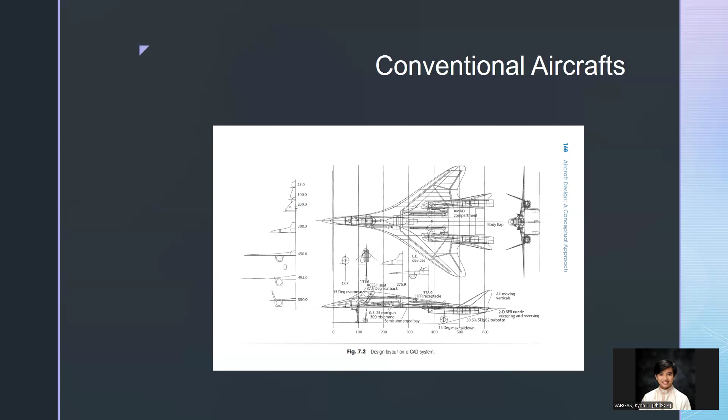As instructed in the syllabus before, you should already know that aircraft design is the collection of all AE subjects—air laws, aircraft systems, aircraft structures, strength of materials, engineering statics and dynamics. These are needed for this.

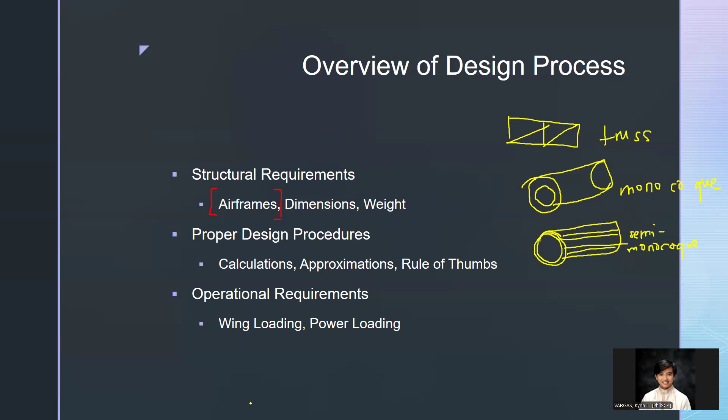Next is dimensions. For structural requirements, why is this important next? Dimensions and weight—these are almost connected. Different aircraft require different manufacturing processes as well as different designs.

So for a large aircraft, let's say the A380, versus a small aircraft, let's say a Cessna, you can't interchange the structural types between them despite one having more pros or cons—let's say the semi-monocoque structure has more advantages—even with materials, you can't just substitute them even if it's supposedly the best.

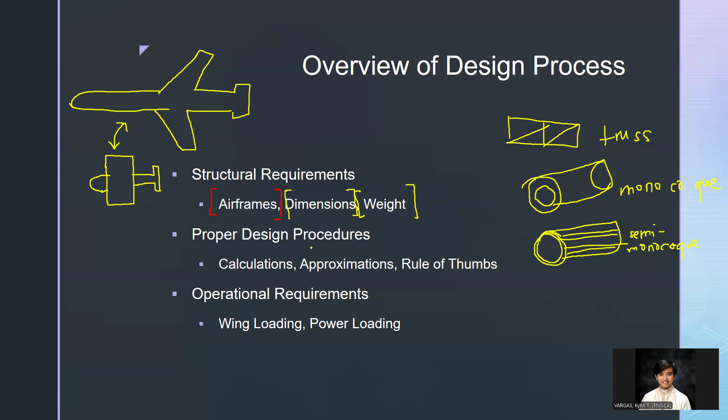Next is proper design procedures. We have three: calculations, approximations, and rules of thumb. For calculations, this is mainly what we'll do, but not the most accurate of all, which involves higher order derivatives and integration.

This also includes matrices seen in simulations. For these calculations, these are the known formulas—you just plug and play, but you need to know the parameters. Next is approximations, also called empirical data. So what is empirical data?

Ito yung mga known data na na-prove, paulit-ulit na lang din ginagamit kaya may pattern na nakuha. Pero kino-compute pa rin siya regardless. May ginagamit lang na values. Ang katulad netong nature ay yung 4.26 or 5.26 dun sa aerodyne nyo for negative g0 over R lambda T. Paulit-ulit na kasi, tas halos same lang yung lumalabas.

So, nagbigay na siya ng known values. And last is yung rule of thumbs, which hindi natin gagawing standardized practice. Ginagamit to madalas sa pag nag-perform na tayo or po-prototype na tayo of UAS. Ano ba yung rule of thumbs? Yun yung parang sinusunod na lang natin, tapos wala naman known data, pero alam natin na gumagana. So baka coincidence lang or baka yun talaga yun na hindi pa lang natin napuprove.

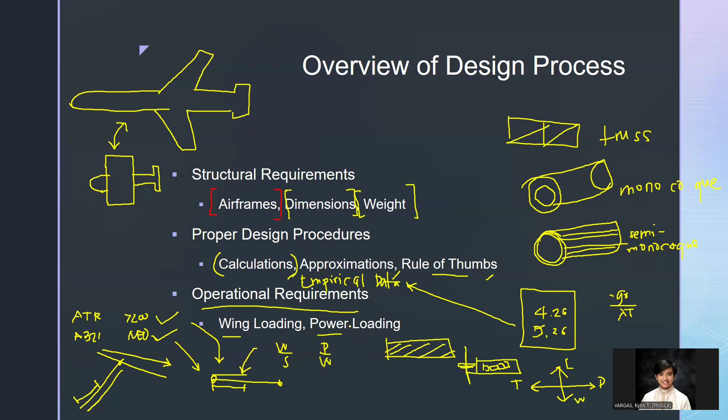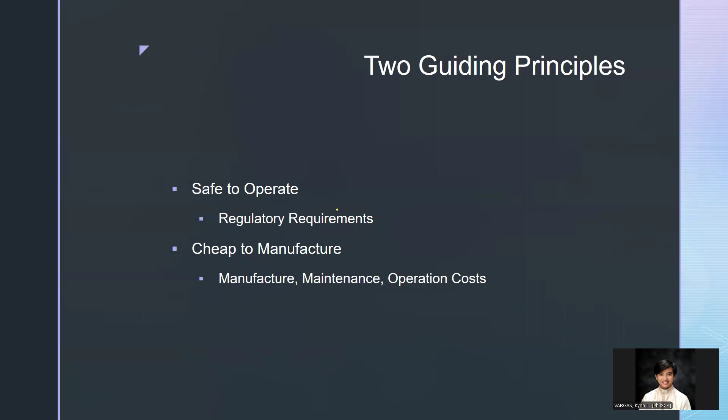So okay na dyan? Dito naman tayo sa two guiding principles which are safe to operate and cheap to manufacture. So ito yung sinusundan natin na ideology when it comes to design. For your safe operation, meron tayong mga regulatory requirements, usually ito yung FAR chapters. Baka nakalimutan na, so meron tayong chapter 21, 23, 25, 27, 29, 31, 33, lagyan natin, skip na, 34, 35, 36. Pakitandaan na ulit to ha. Ito ay aircraft parts and specifications, small AC, large AC, small rotorcraft, large rotorcraft, propeller, engine, noise, tapos pollutants.

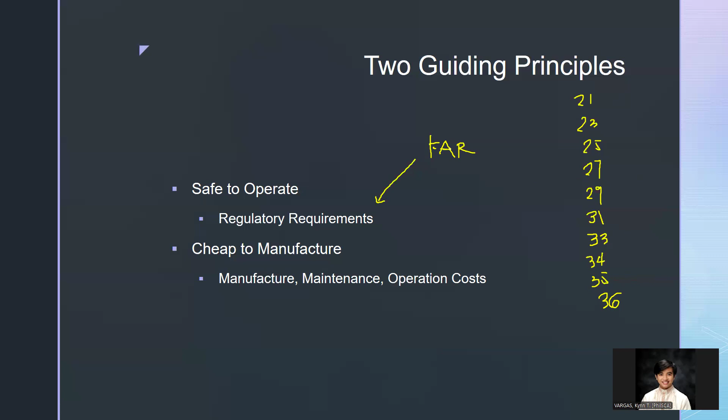So medyo unsure dito sa part na to pero marirevisit naman to. Meron naman tayong books, basahin nyo na ulit kasi nga kailangan ito yung mga items na dapat expected, alam nyo na. So madali naman mag-recap.

So next naman ay cheap to manufacture, maintain, and operate. So dapat pag magde-design is ganun. For this instance, hindi muna tayo mapupunta dito kasi nasa preliminary stage pa lang naman tayo. Pero for the sake of discussion, bakit kailangan cheap to manufacture? Siyempre, para mura yung parts for availability. Bakit kailangan madali ma-maintain? Manpower, like, may cost yan and it's not only monetary but time as well as operational cost. So hindi ka magde-design ng palugi.

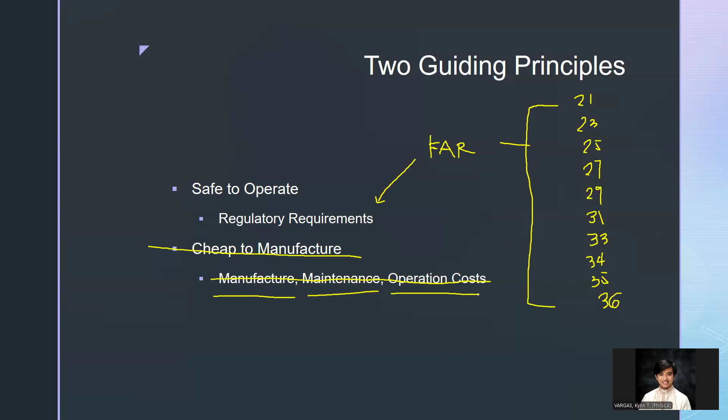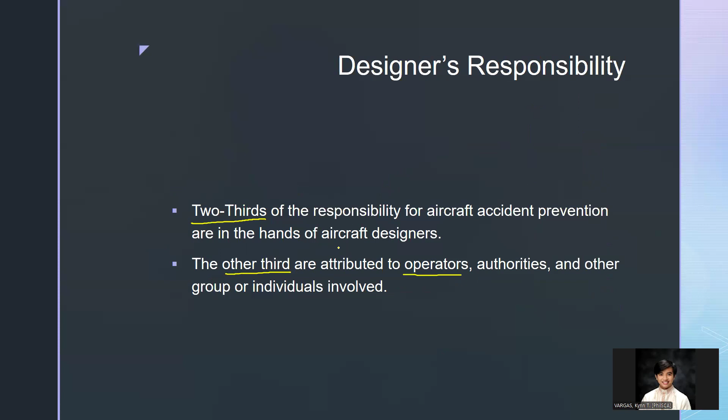So nakukuha yon, proceed tayo sa kasunod, which is the designer's responsibility. Two-thirds of the responsibility for aircraft accident prevention are in the hands of aircraft designers. Yung other third, doon na siya sa mga operators. So ano yung example nito? Ito, if na-encounter nyo to sa APMPC nyo, or aircraft production planning and control. So yung MCAS or the Maneuvering Characteristics Augmentation System is a reminder that poor design will lead to fatal consequences.

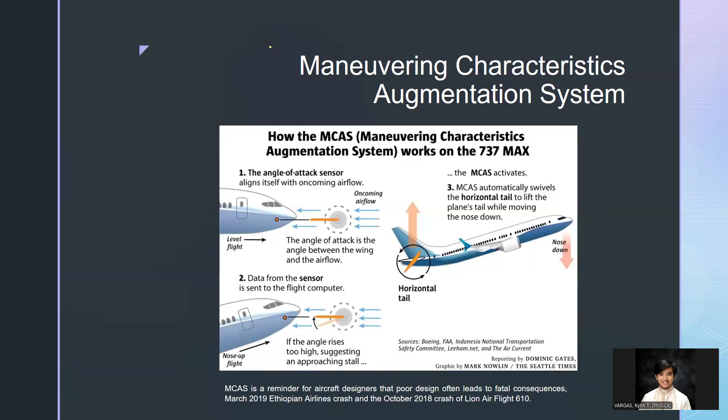So alam niyo naman na siguro kung ano nangyari dito. May automatic sensor kasi na sa isa lang nakalagay, walang redundancy, naging faulty. Then hindi alam ni pilot na may ganun palang system. And ayun, it causes the aircraft to pitch nose up, which is unstable. So pitch up, nose down, bigla magdo-nose down siya. Tapos ayun, nagiging phugoid na siya or nagkakaroon ng oscillations until na hindi na makontrol. So more on that, less on that, more on this.

Dito na tayo sa procedures in design. So for this instance, for prelim, dito muna tayo sa selecting type of airplane.

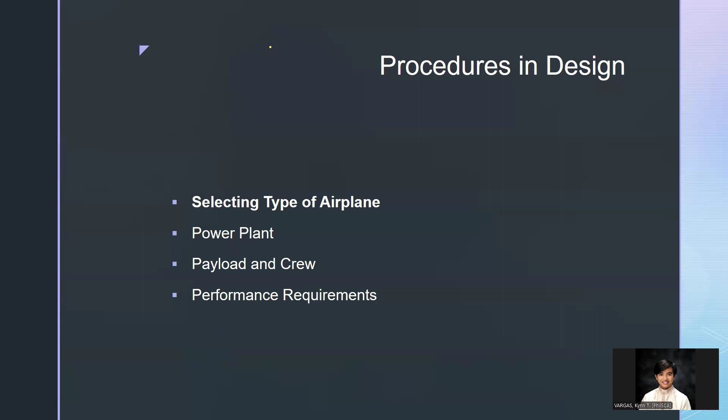So, choosing an airplane: monoplane and biplane. Configurations based on the number of wings attached to the aircraft. Let's start with the biplane.

Theoretically, as you increase wing area, you get an increase in lift. Lift is equal to 1/2 rho V squared S CL. That's correct, right? So let's use the proportionality constant. Let's remove this. What we need is lift and surface area.

When you cancel units, instead of an equal sign, we write the proportionality sign. They correspond directly, meaning this is direct proportionality. So as surface area increases, lift also increases, which is true for a biplane since it literally has two wings. So the lift is stronger, higher.

Let's go back to the proportionality constant so we can use it later. Let's write it again - this time using velocity and CL. We cancel everything except velocity and CL, leaving velocity squared CL. Transferring, we get 1 over CL is proportional to V squared. So this one is indirect proportionality.

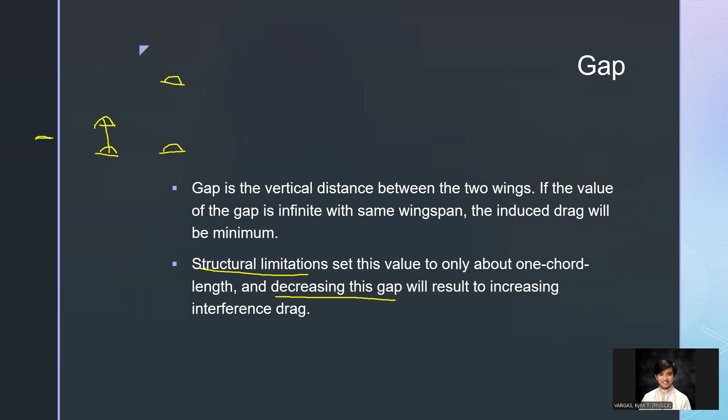Pag dinecrease mo naman yung gap, yung interference, so CDX, kasi i-designate natin as X, tumataas yung interference. So, ayan, ang daming types of drag, baka magkalituhan.

So discuss natin muna yung different types of drag. Wag mo na tong wave drag, this is for Aerodie 3. Doon tayo sa Aerodie 1, which is parasitic, and Aerodie 2, which is induced. Yun yung common na na-discuss. For parasitic, ano yung mga meron dito?

First is yung profile drag, and next ay yung interference drag. Under profile drag, meron pa rin naman dito which is yung form and skin friction. Actually, marami pa to, pero ito yung mga common na ginagamit.

Dito tayo sa CDO. Sa CDI na tayo pala, sa induced. So ito, ang sabi, kapag pataas daw yung value, lumiliit daw yung induced drag. So bakit kaya lumiliit yung induced drag? As you infinitely increase in...

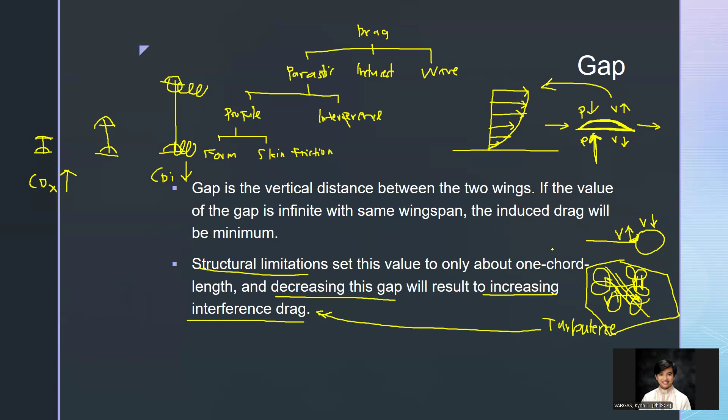Moving forward, dito naman tayo sa span ratio. Pwede nyo itong i-pause dahil recorded session naman to. For span ratio, it is the ratio naman between the shorter wing and the longer wing. The usual biplane configuration is ganito, pantay lang. So ito, ang span ratio nito is 1.

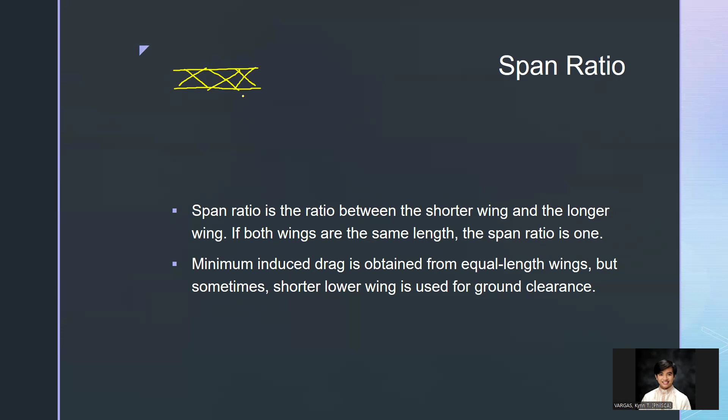Ngayon, bakit may mga times na ganito yung biplane? May mas maikli. So kailan lang to nangyayari? Ginagamit siya minsan for ground clearance. So let's say may mga bush dito, may mga bato. Yun yung purpose nun, kasi hindi naman tatamaan tong mas mataas na hangin.

So ito halos kasi laki lang nung fuselage, which hindi natin problemahin dito. Bakit may mga bato sa may mga bush dun sa runway nito? Tandaan natin, yung biplane kasi usually ginamit siya noong war times o nung earlier development pa ng aviation. So wala pa tayong masyadong magandang runway nun. So yung minimum induced drag is obtained if equal length.

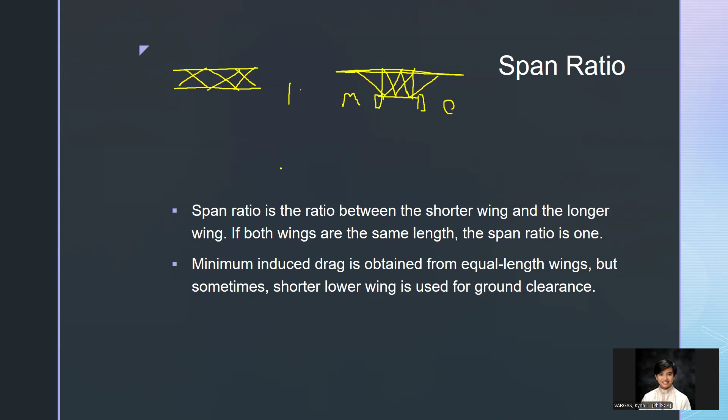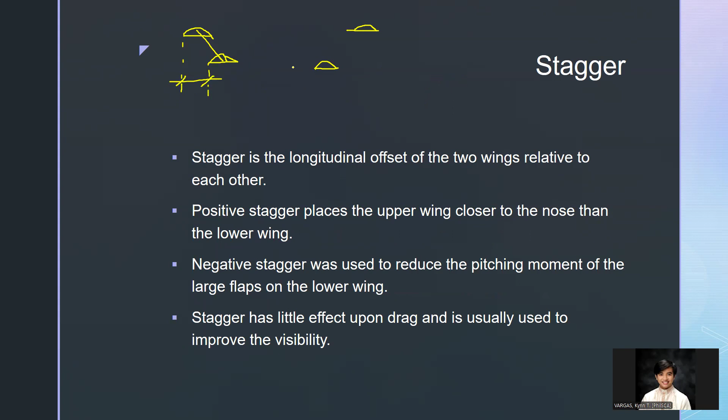So other than that, ito lang naman yung pinagagamitan ng span ratio. Next ay stagger. So napansin kanina, ito, hindi siya pantay, di ba? So dito natin balikan, so stagger tayo. We have positive stagger is if upper wing is close to the nose, and negative stagger is the opposite. Ito yung stagger pala, ayan, yung distance naman na to between the, ano to, the leading edge.

Positive and negative stagger, lagyan natin ng plus sign, lagyan natin ng negative sign.

So ano naman yung introduction, ano yung effect nito? Meron siyang little effect sa drag. Tapos, meron din naman siyang additional pitching moment which is a design topic pa. Pero, ang main talagang purpose niya is for visibility as discussed here.

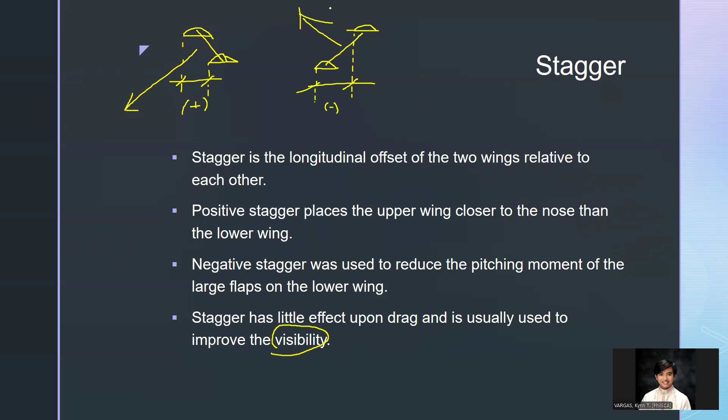Instead of papantayin, why not gawan natin ng view which is for downwards view kung nasa taas ka tas gusto mong atakihin yung nasa baba. And ito naman yung mga low altitude which ang gusto nila is makita yung nasa taas. Yun lang kasimple. Next, decalage.

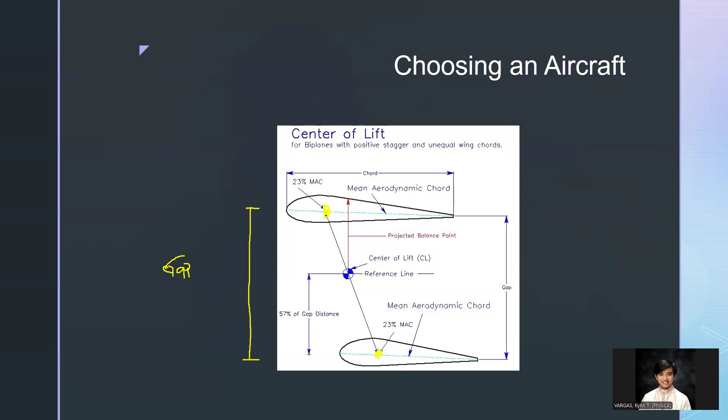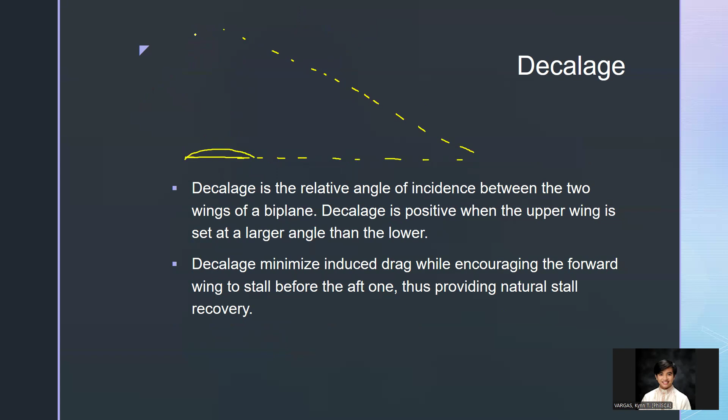Decalage is the relative angle of incidence. So kung papansinin kanina, hindi yan pantay. Naka-angle yan. So ito, ito yung isang wing, airfoil. In-exaggerate ko na lang yung angle.

Tapos let's say, positive stagger. So ano yung purpose nito? I-introduce ko na lang din. This is another aircraft design 2 topic or idea. Pero pag dito tayo sa isa, sa taas, balik tayo sa Aerodynamics 2.

This is the CL versus angle of attack graph. As you increase in angle of attack, ano nangyayari? Nagkakaroon tayo ng increase in coefficient of lift. Pero, further increasing will cause it to stall. So, dahil mas mataas yung angle of attack nitong isa, mas mauuna tong mag-stall compared dito.

Depende kung saan siya nakalagay, it will provide a natural stall recovery. So dito, decalage minimizes induced drag while encouraging the forward wing to stall before the other. Ito yung ginagamit for positive stagger. Kaya nga usually positive stagger yung meron.

So dito, nagkakaroon siya ng mag-stall, maka-cancel, malilipat yung CG. Tapos, ang gagawin niya, magkakaroon siya ng initial response to go back to the equilibrium state. Tapos, ayun, since andito tong lift nito, dito siya iikot. So, imbis na umaangat siya dito, ibabalik niya into the original state.

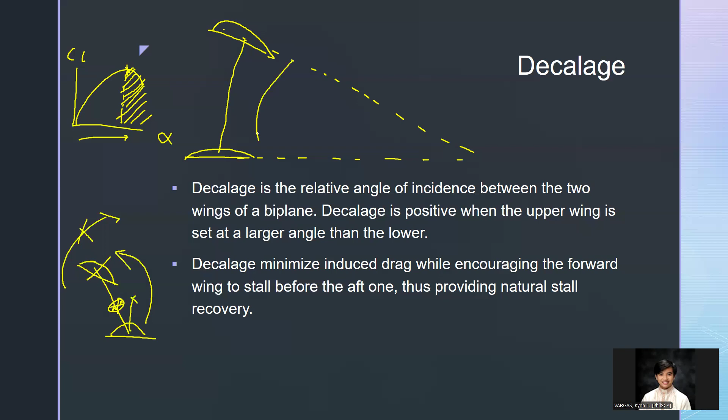Which, medyo magulo pa siya para sa inyo. Mahirap pa siya intindihan kasi it's for a design topic pa. So, before tayo lumayo, intindihin lang natin for now na ang decalage is the opening of the angle of incidence between the two wings. So, nakukuha yan? Proceed na tayo doon sa kasunod.

Ngayon, medyo madami. Tapos, ang ending lang pala, sa biplane kasi, nakita nyo naman na kanina sa introduction, mas lumalaki kasi yung induced drag. Ngayon, induced drag lang ba? Hindi. Meron pa kasi siyang parasitic drag dahil dito sa mga, ayan, meron pa tayong mga struts. So, nagdadagdag pa yan ng parasitic drag.

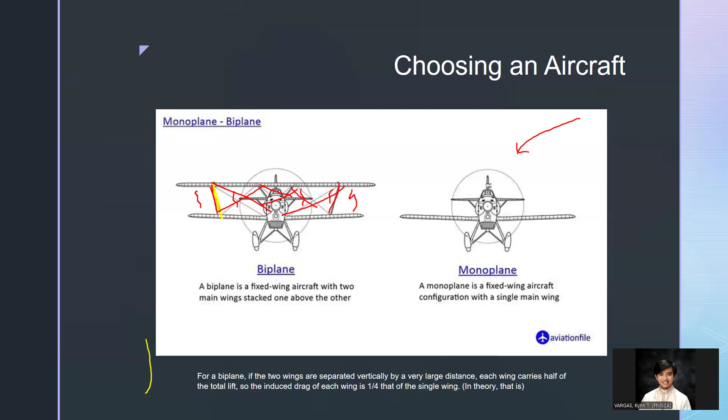And another is interference drag. So, napakarami dyan, no? Madami dyan pwede mag-interaction. So, kung nakukuha yun, intindihin natin na ang kailangan natin ay monoplane configuration. And dito na din yung papagamit ko sa inyo, isasuggest ko sa inyo when it comes to aircraft design.

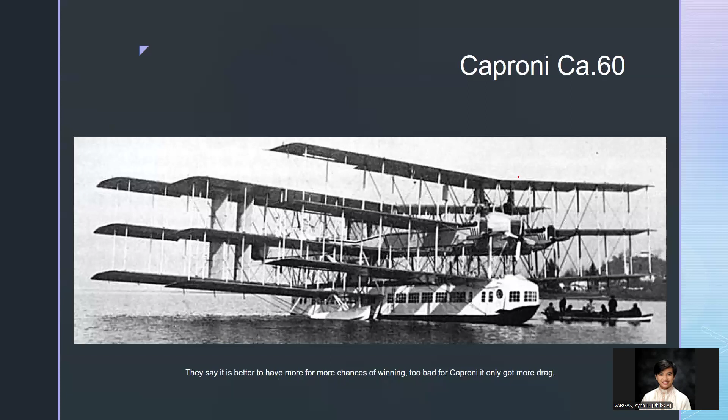Bakit? Ito kasi is another example, Caproni Ca.60. Sabi nila, di ba, mas mataas yung lift, mas maganda, which is not true. As debunked na from previous examples, na-feature pa to sa The Wind Rises. Itong seaplane na to, hindi to lumipad. So, masyado siya maraming induced drag and interference drag for it to generate enough lift.

Let's say, ito yun, gawa tayo ng graph. Let's say, pag mas marami di ba ng wings, mas maraming lift. Totoo naman, ito yung lift. Sa itong kulay pula, gawin nating drag. Ngayon, ito naman yung, let's say, monoplane lang. Ito yung lift, tapos ito yung drag. So, kung titingnan mo, mas maraming lift yung 9 wings compared dun sa 1 wing.

But the problem is, napakaraming sayang dun sa 9 wing. So, nagge-generate ka ng energy for what? Para nasasayang lang. So, hindi siya efficient. Bigger is not always better when it comes to this type of designs.

So, ang kailangan natin is optimal. Hindi natin kailangan na masyado maraming pakpak, maraming masyadong engine, the best of this, the best of that. Ang kailangan natin is kung ano yung hinihingi sa requirements. If nakukuha yon, proceed tayo sa kasunod.

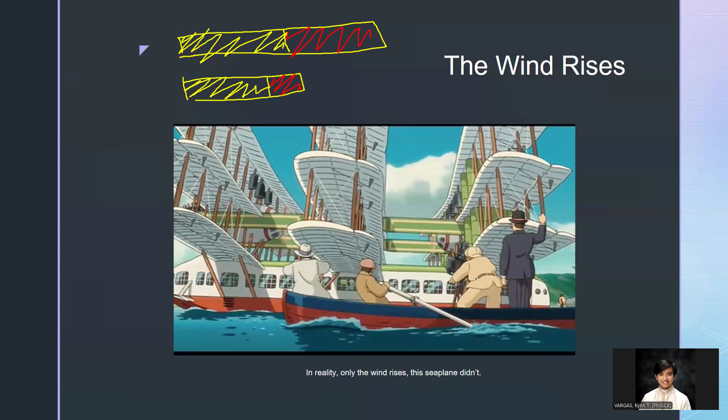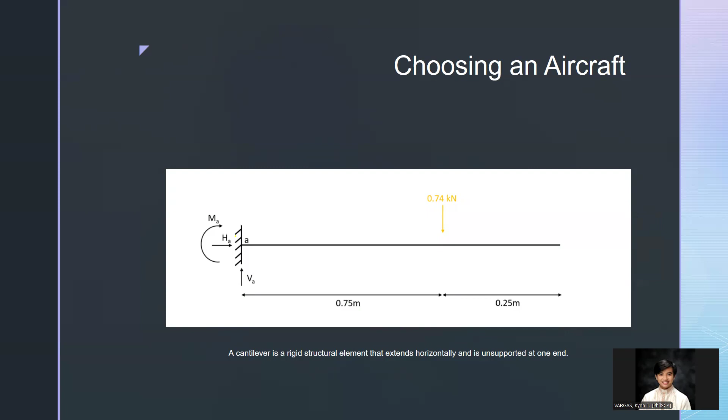Kung sa tingin nyo, meron tayong moment. Ito yung full cantilever. So, ito, mapapalabas na kung saan dito yung calculations. Bakit kailangan yung full cantilever for aircraft design? Full cantilever is, wala tong mga additional support sa labas. So, less drag to. Medyo mabigat lang siya, pero structurally just.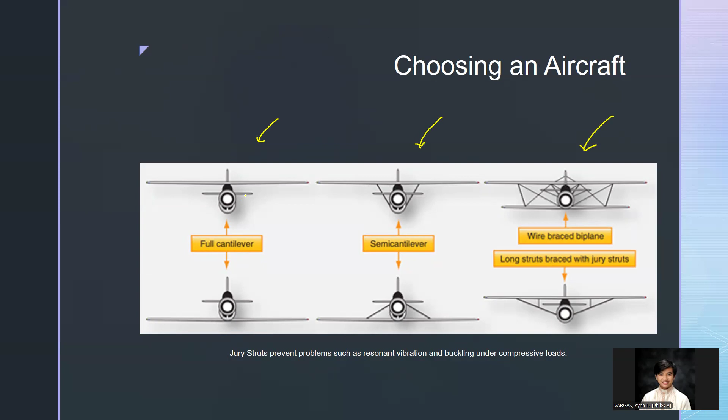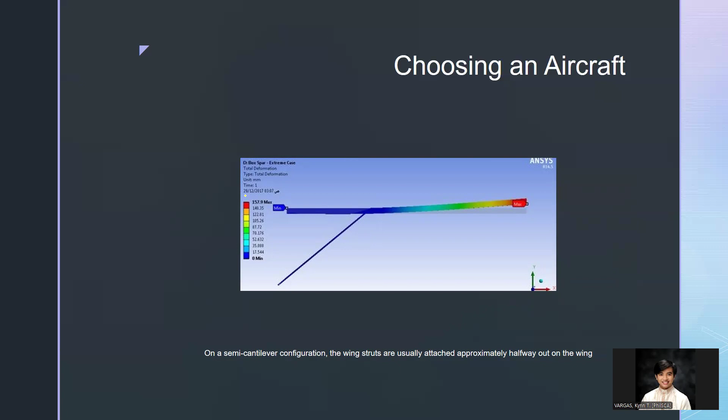Matibay to. So, next naman is semi-cantilever. Meron siyang structural support sa loob, pero meron din siya sa labas. If sobra siya sa, let's say, for stability na lang siya, magiging indeterminate na, okay lang din naman, wala namang problema doon.

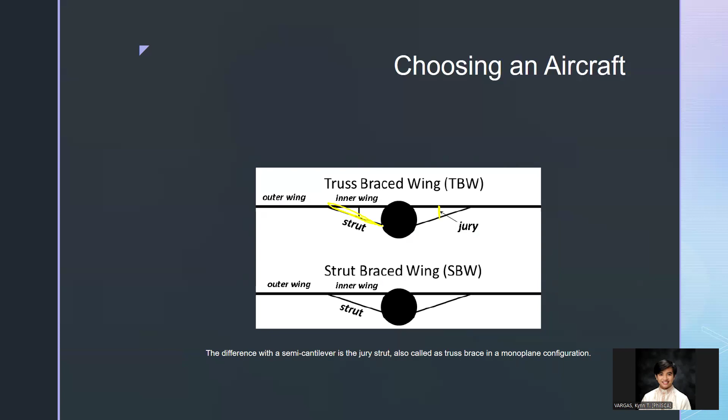Next naman is for, ito yung jury struts na. So, ito yung jury, kasi ito yung struts. So, ano yung purpose din? Yung kinaibahan niya sa strut-braced wing is, ito yung kanina, sinasalo lang diretso yung member. But for jury strut, mainly wala siyang structural support sa loob. At hindi naman sa wala, may lighter, on the lighter end lang. At yung jury strut yung naghahawak dyan sa kanila. So if tinanggal mo yan, baka magkabaklas-baklas yan. So yun lang.

Next is the wing position. For wing position, we have based on position and structure. First, there are three: mid-wing, low wing, and high wing. This is just their position based on the fuselage.

Next, we have dihedral and anhedral wing, which is an angle. For section 2 that we'll watch, yes, it's true as I said before that it depends on configuration.

The usual is for high wing, anhedral is applied, and for low wing, dihedral is applied. For obvious reasons, dihedral adds stability. And for anhedral, it adds controllability. Let's not consider the other configurations for now.

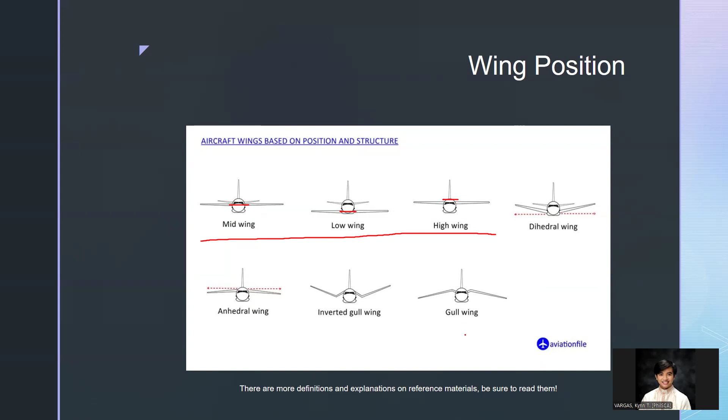Let's focus on the anhedral of the high wing and dihedral of the low wing. Next is the inverted gull and gull wing, which is just a combination of the two, anhedral and dihedral. There are more details here, be sure to read them. There's reference material I gave for your assignment, read it.

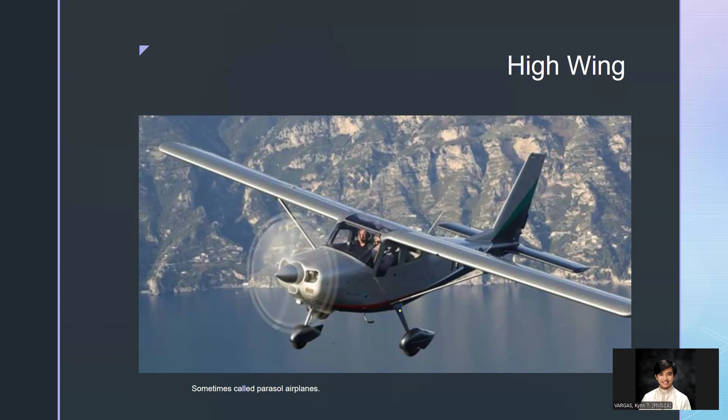More ground visibility too. That's why it's usually used for recreational flying. It's almost an unobstructed view. Same with student pilots. Next is stable or easy to fly.

Stable in low speed. Talking about stability, for high wing, it's easier, it's more stable. And for low wing, it's more controllable.

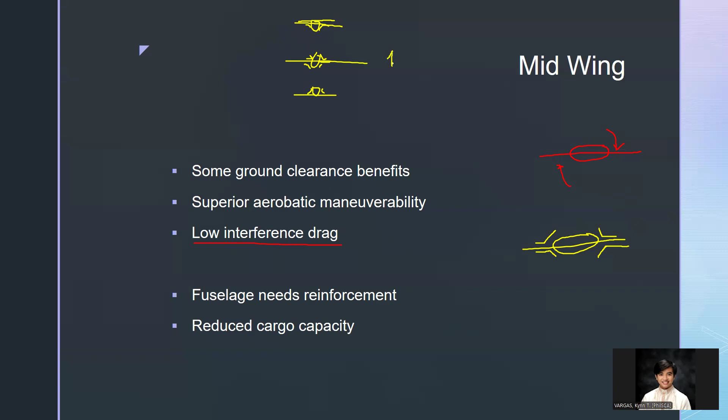If you consider what was said earlier, for low wing and for the Aerodynamics 1 concept, let's say this is the airfoil, the velocity of the body or fuselage is low. Now, on the upper surface, the velocity is high. For the lower surface, the velocity is low. So now with that idea, when you look at it, this is similarly low compared to the high wing.

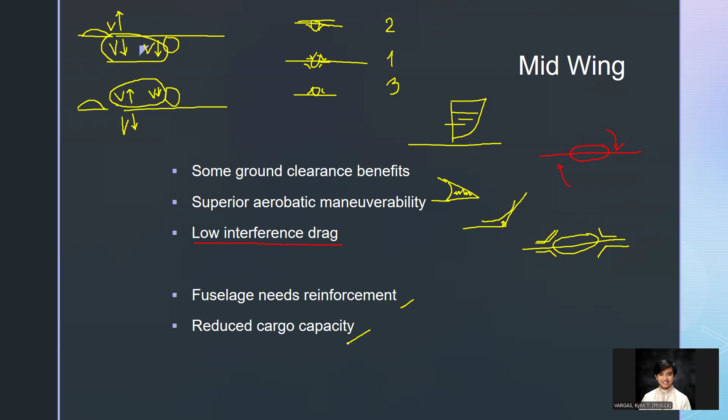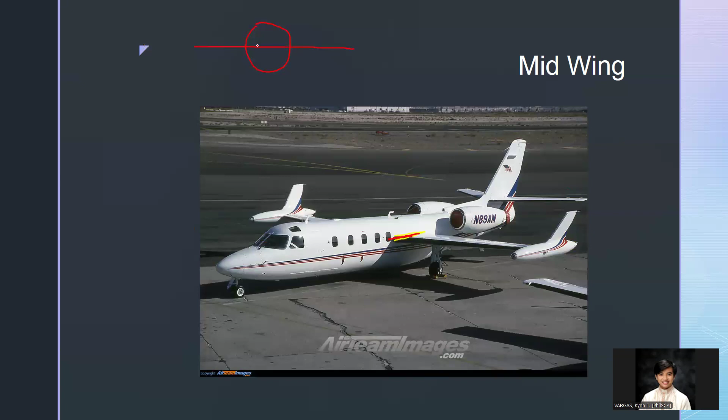Fuselage need reinforcement and reduce cargo capacity. Ano yung kailangan nating intindihin? Fuselage needs reinforcement. Tingnan natin dito. Nag-cut through kasi sa gitna yung structure. So, it's either one, literal na pumasok siya dito, or two, puputulin yan.

Dito muna tayo. Pag dumire-diretso yan, wala nang space dito, so it's mainly for structure lang. Pero kung puputulin naman natin siya, need natin ng structural reinforcement. Let's say ganyan, while yes, accessible pa din, mas mabigat naman to. So, either of the two, lagi siyang merong reduced cargo capacity and meron siyang additional reinforcement. Hindi na nagiging usable space.

For fighter jets, hindi siya iniinda kasi lalagyan lang yan ng fuel. Pero dito sa transport, kung mapapansin nyo, walang bintana dyan hanggang dulo. Hindi na siya magagamit. Hanggang dito na lang yung usable for cargo, for people. Kung ano man yung itatransport nito.

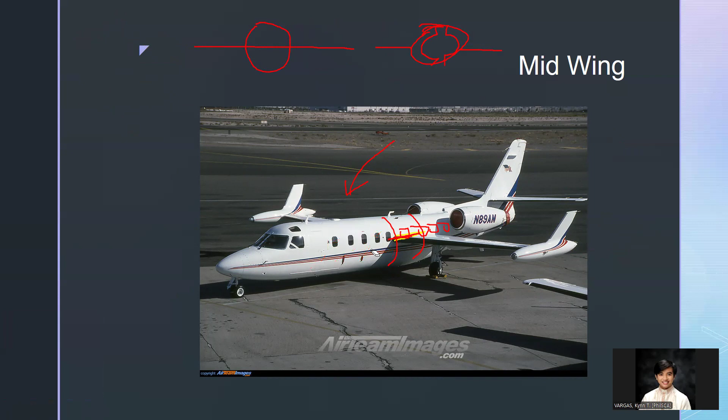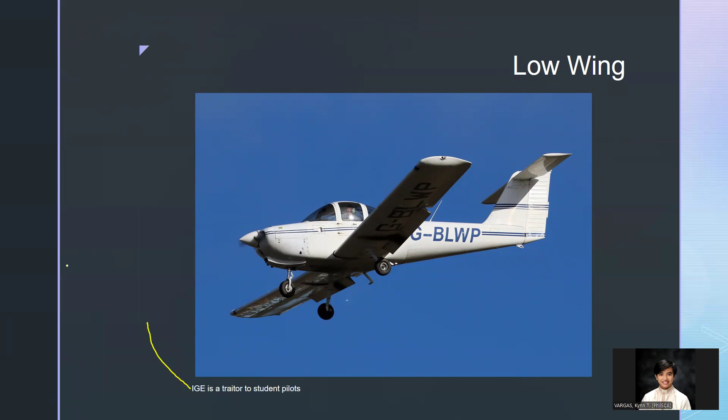Kung nakukuha yun, doon tayo sa low wing, which is opposite naman. Pero meron ditong topic na kasulat - IGE. Kung hindi pa familiar kung ano ang IGE, it's in-ground effect. So, IGE is a traitor to student pilots. Bakit kaya? Bakit madalas high wing yung ginagamit?

May mga advantages pa din naman to. Landing gear is integrated in the wing box. Kung napapansin, hindi naman napakaliit, maigsi yung landing gear. Pwede kasi siyang ipasok dito, magiging flush siya. Unlike dito na hindi mo mapapasok yan. For low wing, kayang-kaya mo ipasok sa loob without sacrificing in structures.

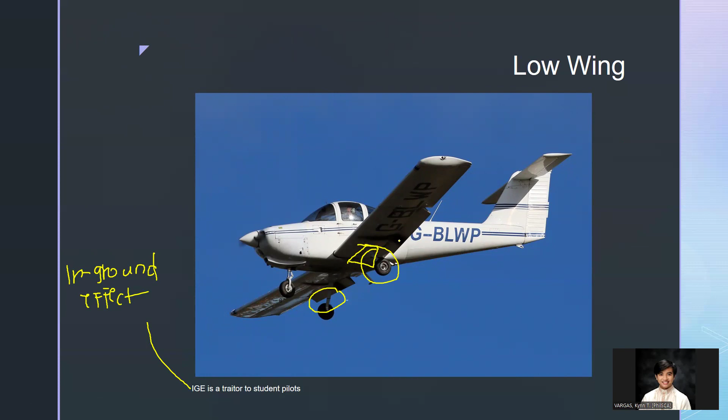Kasi makunat na yung wing box, dikit-dikit yung frames at ribs niyan eh, saka yung mga stringers niyan, may I-beam pa yan. So, landing gear is integrated in the wing box. Less drag din yan, kasi may flush mo to, matatago mo to eh.

So next ay good climb visibility. Poor ground visibility, the opposite lang naman. Low ground clearance, controllable, another opposite lang din nitong isa. Dito tayo mag-focus sa faster maximum speed with less drag.

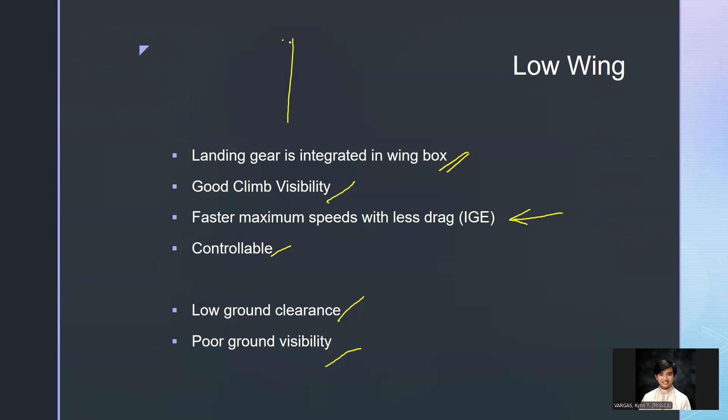Bakit less drag? For IGE kasi, nag-occur siya one wingspan. Let's say ito yung aircraft. So, one wingspan sa ground, nag-occur yung IGE. Anong meron sa IGE? Yung induced drag kasi is ganito, nagta-travel siya here, ito yung arrow, tapos iikot siya papunta dito.

Bakit siya umiikot? Ang gusto kasi nito is higher pressure region will go to low pressure region. Pagdating dito, mas mabilis to compared dito. Bakit? Boundary layer, tulad nung kanina, mabagal dito, dito mas mabilis. Ngayon, ang nangyayari, may direction dito, umiikot. Ito yung in-ground effect.

Tingnan natin dito. For out-of-ground effect, iikot lang kasing ganito yan yung hangin, yung induced drag. Pero, for in-ground effect, nababasag kasi siya. So, ang nangyayari is ganito na lang, nagiging patulak siya imbis na paikot lang. Ngayon dahil patulak siya, tumutulak yung low wing natin na aircraft.

Nagkakaroon tayo ng floating tendency, which is more evident sa low wing, kasi siya yung mas malapit sa ground eh. So compare mo yan sa low wing saka sa mid wing, high wing. Low wing yung may pinakamalakas na IGE. Engineer, lumulutang pala, may dagdag lift.

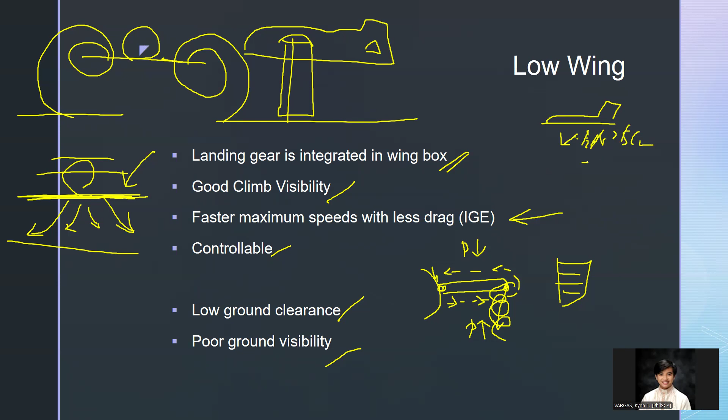I-compare natin si v squared and cl. So, meron tayong equals v squared cl. Cl is proportional to 1 over v squared. Pwede din baliktad, v squared is inverse to CL. Ngayon, during landing, mabagal si velocity. Therefore, si CL mataas to compensate sa lift para maging airborne siya.

Ngayon, using the CL-alpha graph, ito ay CL, ito yung angle of attack. Kung nagtaas si CL, mataas din si angle of attack. Na question, kapag nagla-landing tayo, tas dumulutang ka, mag-overshoot ka, di ba? So, ang gustong gawin ni student pilot, ipupull up niya. Ngayon, nag-pull up siya, dahil mataas na yung angle of attack, ang mararamdaman ng aircraft mo, lalong lumalakas tumataas yung angle of attack.

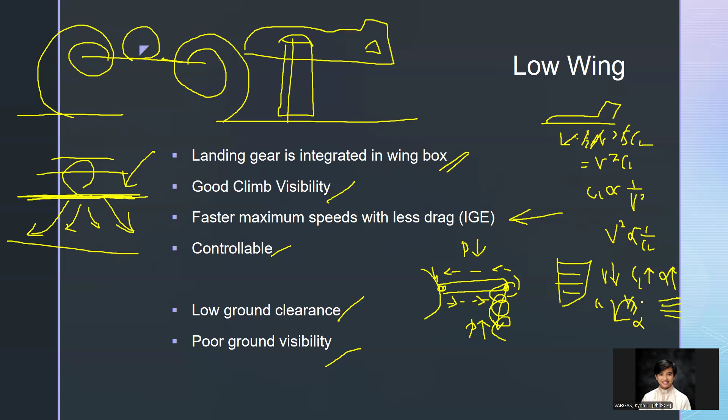So, mag-i-stall ka ngayon. Dahil nag-stall ka, babagsak yung aircraft. This is the reason why maraming mga low-wing na aircraft ay nagkakaroon ng crash pag student pilot yung nag-handle because of the in-ground effect, unfamiliar with the in-ground effect and hindi din alam kung ano yung dapat gawin. Nakuha yun? If yes, proceed tayo dun sa kasunod - Dihedral.

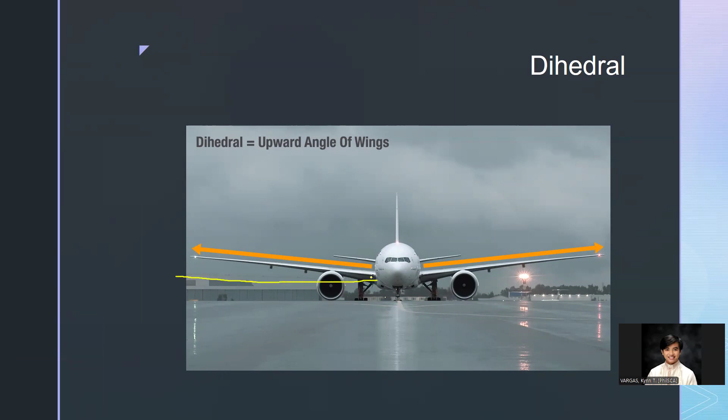If you notice, ito yung plane reference, tas meron tayong angle. Yung main reason kasi dyan, marami. Isa na dun is yung for fuel purging, kasi dito maiipon lahat ng debris. At kapag ganun, let's say yung water yon or contaminants, mas madali siyang matatanggal from the aircraft. Pero yung pinaka main reason niya for engineering approach is for stability, which is good stability, common in aircraft, the airline aircrafts that requires passenger comfort.

Ngayon, itong tatlong to, paano natin siya discuss na hindi nagbabasa lang. I-drawing natin dito. Yung una, meron tayong aircraft, compare natin yung dalawa na nasa bank.

Nagro-roll. Ngayon, di ba sabi natin kanina, etong low wing, nagkakaroon ng build-up pressure dito. Therefore, nagkakaroon ng rolling moment. Ngayon, anong magiging problema natin doon? Unstable or controllable itong low wing.

So, pag nilagyan natin ng dihedral, meron tayong dalawang winds. One is ito, yung relative wind dito. Tapos dahil pababa to, dahil nagro-roll, meron ka pang isang relative wind dito. Anong mangyayari doon? Yung wind natin is usually meron siyang angle. Dito, pinagsama na natin yan.

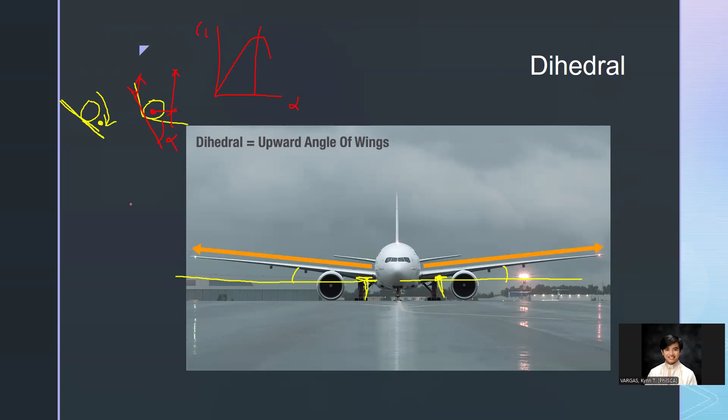Ang sabi, lower wing in bank has greater angle of attack, mas malaki ang angle of attack nito compared dito. Therefore, using the CL alpha graph, mas malaki yung angle, mas malaki yung lift compared dito. Kung mas malaki yung lift nito, ito yung CG, meron kang arm, meron kang moment. Mas malaki yung moment nito, so magkakaroon tayo ng rolling motion opposite dun sa bank. Therefore, babalik siya, itong dihedral natin, babalik siya dun sa level flight.

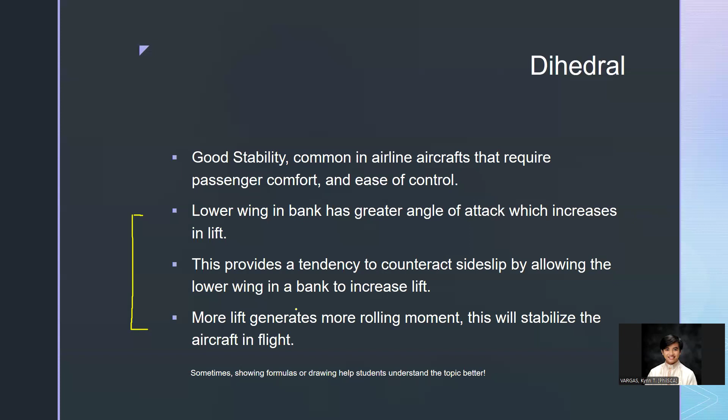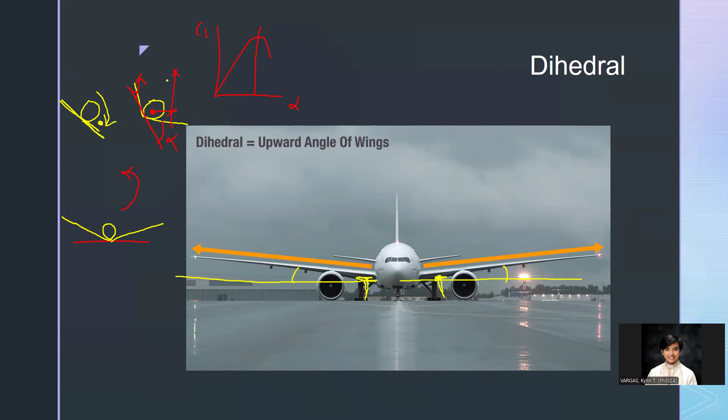Ito yan. Itong tatlong to, pinagsama-sama ko na lang dito sa drawing na to. It's up to you if gusto nyo i-memorize or if gusto nyo siyang i-conceptualize using drawings. With that, expected na for anhedral, yung opposite naman to. Usually yung anhedral, ginagamit siya for high wing, tulad nitong Antonov AN225. Opposite yung magiging interaction yan. Ito naman ito yung written explanation, kaya nyo nang basahin to.

Ipapakita ko sa inyo how para sa visual. Ngayon, stable na kasi to, so bakit natin gustong bawasan yung stability and gawin natin controllable by introducing anhedral? So for Antonov AN225 kasi, the reason kung bakit siya high wing is for cargo, mainly not reconnaissance, mainly for relief operations tong Antonov AN225. Ginamit siya for relief operation kaya nga targeted siya during the war times, which is nasira na siya ngayon.

Ngayon, another thing is kapag high wing, yung cargo nito mababa. So, pagbukas ng pinto, katulad ng C-130, hindi mo na kailangan ng belt loader para i-unload or mag-load ng cargo, kasi nga relief to, diba? Ang importante dito, mabilis ibababa, saka iaakyat yung mga relief na mga items. So yun yung isang reason kung ba't high wing.

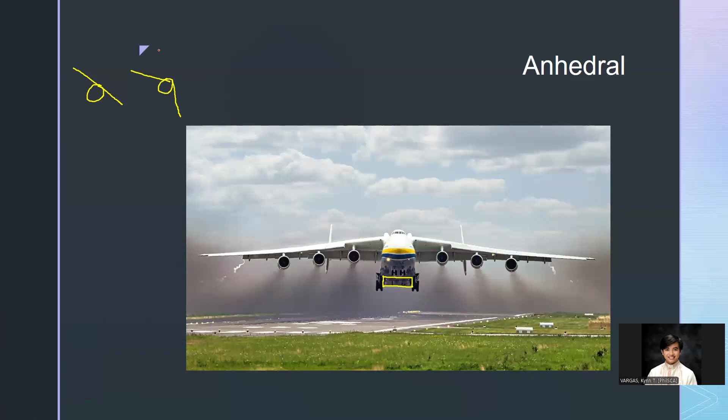Ngayon, ang gusto kasi nila maging controllable to kasi military aircraft nga, diba? So may pagka-military to, yung operations. So gusto nating dagdagan ng konting controllability. That's why maglalagay tayo ng anhedral. And the same reason with kanina. So dito,

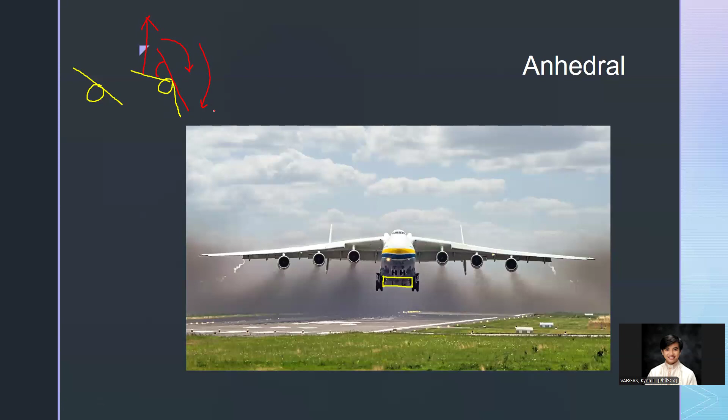If we are to introduce yung sa angle, so ito mas malaki. Mas malaki yung angle, mas malaki yung lift, mas malaki yung moment. Sinusundan niya yung moment nito, yung rolling moment. Therefore, it is much more controllable than before. So, opposite lang naman siya nito, dihedral, kung nakukuha. So, another is anhedral. Ito ay aircraft design to na.

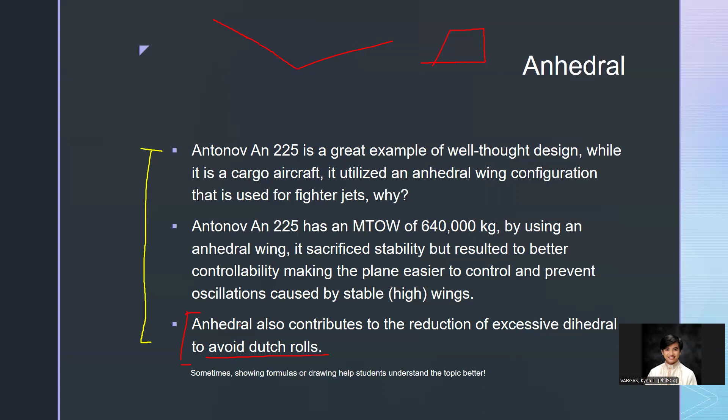Anhedral contributes to the reduction of excessive dihedral to avoid Dutch roll. Kasi nga, ang kinokontrol natin ay roll. Yung pag may dihedral angle, same with tail, pa-increase ng pa-increase yung dihedral effect. Dahil doon, pag mataas yung dihedral effect, nag increase yung Dutch roll. So, tandaan nyo na lang muna for now, medyo mahirap pa kasi siya or medyo complicated na topic pa siya, which is for stability and control pa ng aircraft design to. Tandaan nyo na lang to, na anhedral prevents excessive dihedral. So, dito na tayo sa combination of the gull wing and the inverted gull wing.

Parehas lang naman sila na combination of anhedral and dihedral, but the key difference is kung sila. Taken for example itong Dornier DO-26 for a gull wing design. Meron siyang properties of both anhedral and dihedral, pero meron silang key differences. Dito, i-drawing muna natin. Ito yung itsura ng gull wing.

Ang sabi, reduced drag because of reduced wingtip vortices. So may engine dito, di ba? Ang main purpose pala ng isang gull wing is simply to itaas lang yung engine from the ground, pero hindi to ground.

Asan yung landing gear nito? Ito ang landing gear, this is called the hull landing gear. Seaplane kasi to, so ilalayo natin yung propeller sa tubig. Kapag propeller sa seaplane, 18 inches ang clearance niyan. 9 inch naman kung ang clearance na hinahanap natin is for normal aircraft category, nasa lupa na naglaland.

So dito, yung wingtip vortices may ingest dito, so nagko-contribute sa thrust, ignore na natin yan. Dito tayo sa kasunod. So dito, maiksi na lang compared sa full length, di ba? Ito na lang yung focus natin. Therefore, kung mas konti yung air na magga-gather papunta sa dulo, mas maliit yung wingtip vortices.

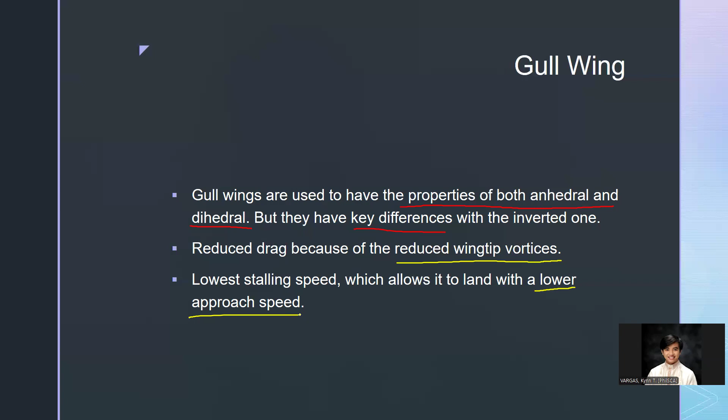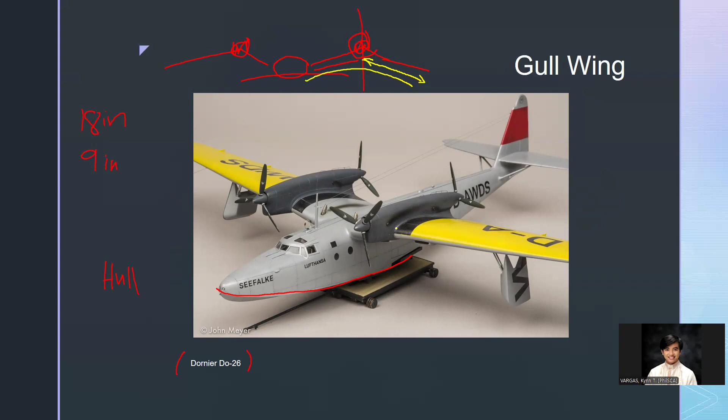So, low yung stalling speed niya, which allow lower landing approach. Pag lower landing approach, mas better for seaplane kasi hindi masyadong tatalisik yung tubig and hindi din siya bumubulusok pababa sa ilalim. So kung nakuha yon, doon naman tayo sa inverted gull wing.

For inverted gull wing naman, ang main reason niya is ang laki kasi nito, ang laki ng propeller niyan. It's around 4 feet to 6 feet yung propeller. So ang main reason nito is for the landing gear talaga. Landing gear could be shorter and allowed to retract back in straight uniformity.

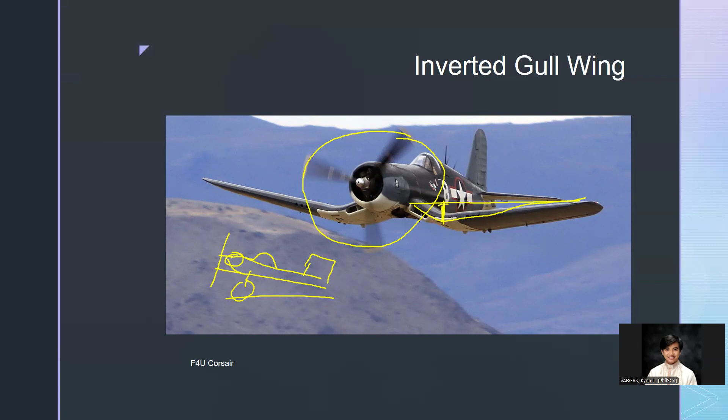So ang gusto dito ng pagkakadesign, since conventional to, ganito yung design niya, conventional. Imbis na pahabain yung landing gear kasi malaki yung propeller, ang ginawa is nag-introduce na lang ng inverted gull wing. So ito effectively, nakita niyo tong space na to, yan na yung dapat na length ng landing gear. Imbes na ganito kahaba, ganito na lang kaiksi yung landing gear. Ito again ay madadiscuss pa naman, but this one is the conventional landing gear.

Tapos, yung common ngayon or yung modern is the tricycle landing gear. So tricycle is opposite lang naman, andito yung maliit, tas andito yung main. But for tricycle configuration, ay conventional, ito yung tinatawag na tail dragger. Hinahatak yung buntot, kasi nasa lupa siya.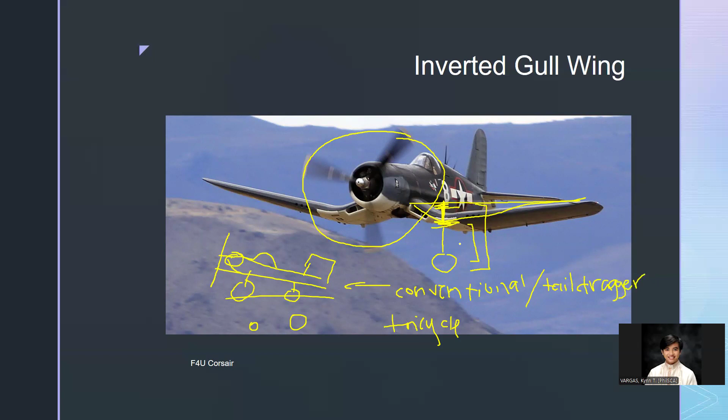With that, proceed na tayo dito. Main structure, isa-isa lang natin. We have the power plant, the wings, the fuselage, the landing gear, and the empennage. Meron 5, pero eto sulat ko na lang yung 5 ha. Empennage.

Meron tayong wing, meron tayong power plant, meron tayong landing gear, 1, 2, 3, 4, and meron tayong fuselage. Pero ano yung mga confusing terms? Isa-isa natin. For power plant, we have power plant 1 and 2, di ba? Power plant 1 is reciprocating engine and power plant 2 is gas turbine engine. Ngayon, power plant ba is yung engine mismo?

Mali. If you are to use the analogy, let's say sa industrial use, meron tayong engine, yung power plant di ba. Meron tayong power plant, so meron tayong engine, tapos meron doon nakadugtong na generator. Yung purpose nun is to provide electricity. Pero for our use for aircrafts, meron tayong engine core, then meron tayong propeller blades, kasi ang kailangan natin ay thrust, not electricity.

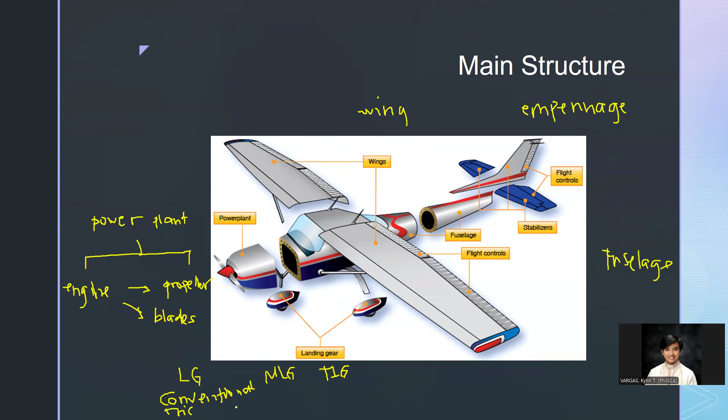So next, landing gear naman. Kapag conventional, ang landing gear niyan ay main landing gear sa harap, MLG sa harap, tapos tail landing gear sa likod. But for tricycle, so ito trike, meron tayong nose landing gear sa harap and main landing gear sa likod. So, ganito yung itsura nun.

So conventional, tas tricycle. Sa conventional, dalawa, tas may tail. Sa tricycle naman, may maliit sa harap, tas merong main, dalawa. So madidiscuss pa naman to and na-discuss naman na siya, don't expect me to go in detail about that.

So, ito is dapat mga bagay na alam nyo na. Minsan nakakalimutan or talagang hindi nadaanan, or medyo blurry na yung idea about that. Pwede naman basahin, pero provide ko naman yung reference materials. Nire-recap ko pa rin naman siya, pero hindi na ganun ka-in-depth.

Okay, so dito naman tayo sa empennage. Yung wings kasi, wings na yan. Yung fuselage na rin yan. Ngayon, sa empennage kasi, ano yung pinagkaiba niya sa tail group? Sa tail group kasi, ito lang yon. We have the vertical tail and the horizontal tail.

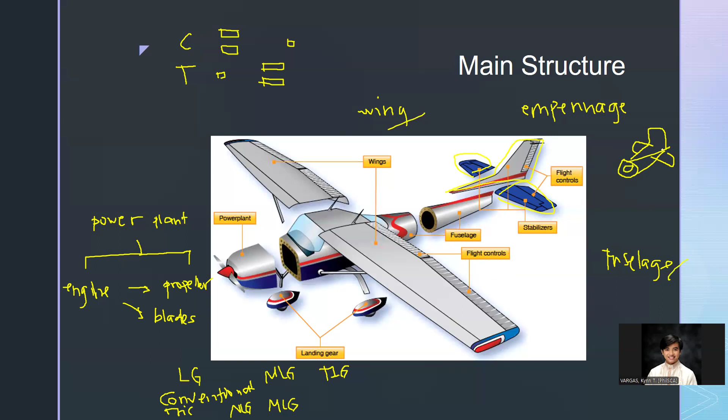But for it to be called the empennage, kailangan natin tong tatlo. Vertical tail, itong last na bulkhead, tapos itong tail cone. Ito yung empennage, parang isang buong buntot. Hindi lang siya yung mga fins.

So, nakukuha yun? Ngayon, palawakin natin. Ayan, masyado madami. Ngayon, paano natin to hihimay-himayin na may intindihan pa rin? So, dapat kasi masanay kayo na nagdo-drawing. So, let's say drawing natin to. Tapos, simple aircraft muna tayo. So, dito, alam naman natin yung mga naunang parts.

So, this one is the power plant. Itong katawan ay fuselage. Ito ay wings. Ito ay empennage. Tapos, let's say ito ay landing gear. So, ngayon, isa-isahin naman natin yung mga kasunod na importante.

So, yung mga controls muna. For tail, itong unahin ko, ito yung rudder, responsible for yaw. Next, ito namang elevator, responsible for pitch, up and down motion. So, intindihin natin kung paano siya gumagalaw ha.

Tandaan for rudder and for elevator, kung saan siya ka nakaharap or kung saan mo siya ide-deflect, dun siya pupunta. So, rudder deflected to the right will yaw to the right and to the left will be left. Same with elevator. If ipipitch up mo sa elevator, magpipitch up yung aeroplano mo. And same with pitch down.

Next naman ay aileron, located siya outboard. Hindi siya located sa pinakang wingtips kasi may induced drag dito. Hindi din naman siya located dun sa loob dahil may interference drag. So, responsible siya for roll control.

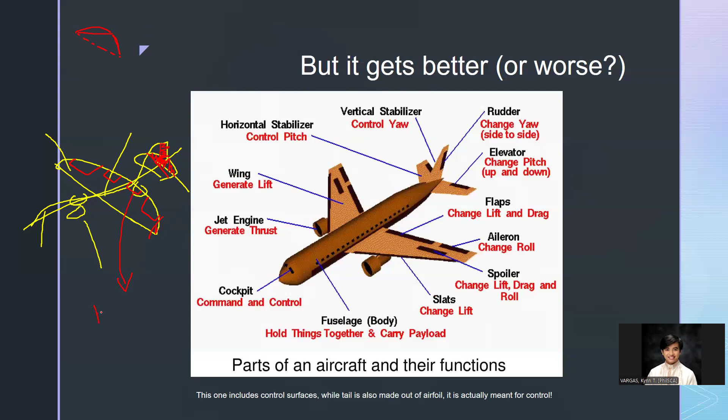So, next naman natin, ito is mga other parts na. Yun lang mainly, yung controls natin for yung mga kailangan natin. So, ito naman is kayang memoryahin. Pero kapag na-visualize mo kasi siya kung saan siya nagmula pa, kaya mo i-drawing, madali mo na siyang ma-identify. So, ito is more on detail view na lang. Yung kanina is mga main parts. Ito mga kulay pula is yun yung mga responsible for controls. Ito pala is lagay ko lang, yung flaps ay example ng HLD or high lift devices.

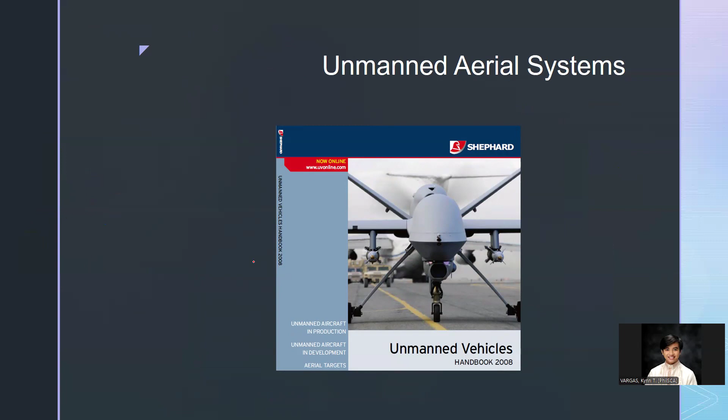So, ngayon, magpo-proceed na tayo sa technical reports nito, which is, dito na kayo mag-base sa Shephard. Dito kayo maghahanap ng mga available. Pwede din naman kayo mag-base sa iba, but for Shephard, ito na yung mga known na UAS.